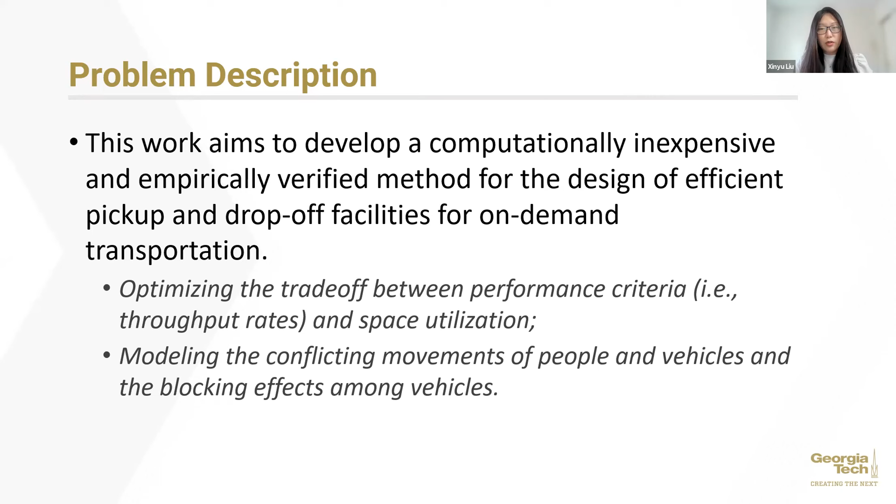Here are certain facility layouts that we're examining, and our goal is to look out for the best facility layouts among several types I'm going to introduce right now.

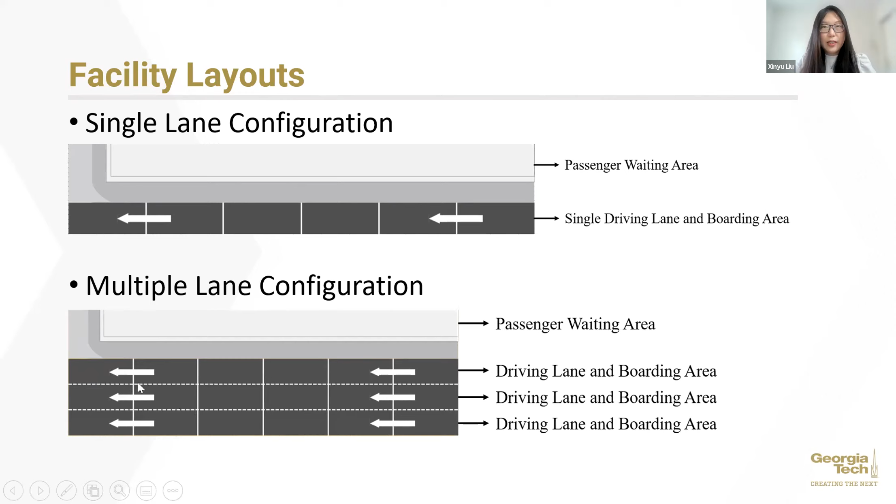The first one is a very common one, called a single lane configuration, such that there is a single driving lane and vehicles can park on the driving lane and pick up and drop off passengers on this single driving lane. Similarly, we have a multiple lane configuration, which is just parallel single lane configurations, and we can treat the system as independent lanes that are each operating on their own. We can see this example quite frequently at places like airports.

The next configuration is called a single-sided zero-degree configuration. By single-sided, we mean that there's a boarding area with boarding spots on only one side of the driving lane. By zero-degree, we mean that each boarding spot in the boarding area is parallel to the curb, that is, the angle between the boarding area and the curb is 0 degrees. Similarly, we have a double-sided analogy for single-sided design, such that each driving lane is neighbored by two boarding areas on its both sides.

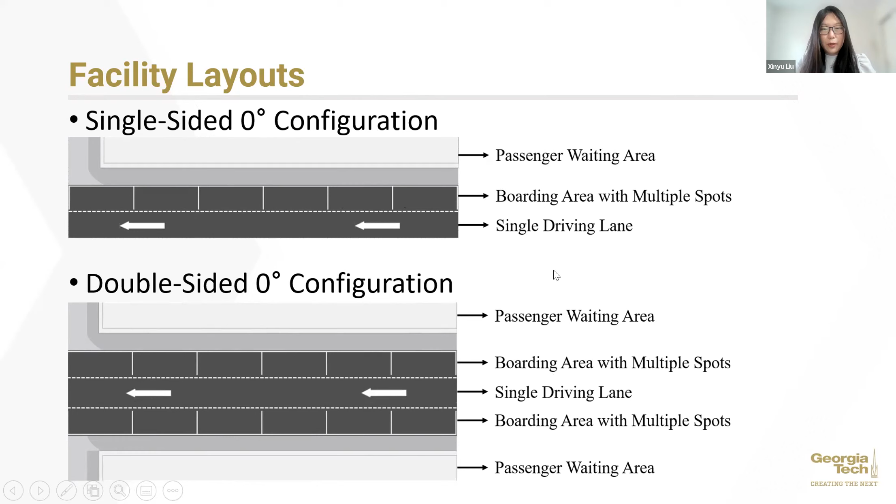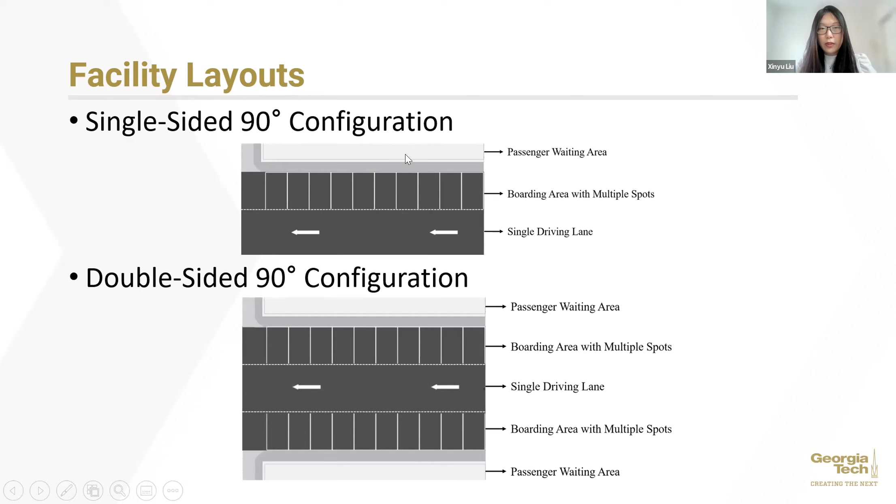Similarly, we have a single-sided 90-degree configuration. It differs from the 0-degree configuration in that each boarding spot is orthogonal to the curb space, such that the angle between them is 90 degrees. More often than not, in practice, we can see angled configurations, in the sense that the angle between the parking lots and the curbside could vary, like 45, 60, or 75 degrees as well. We would just like to highlight that our model can accommodate all these different combinations.

So without further ado, I'll just jump into the numerical results and share some insights that we observed from our simulation results.

Next, I'm going to present basically 6 types of configurations. As we have seen just now, we have single-sided versus double-sided configurations. We also have 0-degree configurations versus 90-degree configurations. In addition, we consider 0-degree configurations with long spots, such that each boarding spot is long enough for vehicles to enter and exit both by going forward.

Another alternative to the 0-degree configuration is when we have short spots, such that vehicles have to back into the boarding spots when they enter. And for 90-degree configuration, for safety considerations, we assume that vehicles always enter by going backward and exit by going forward.

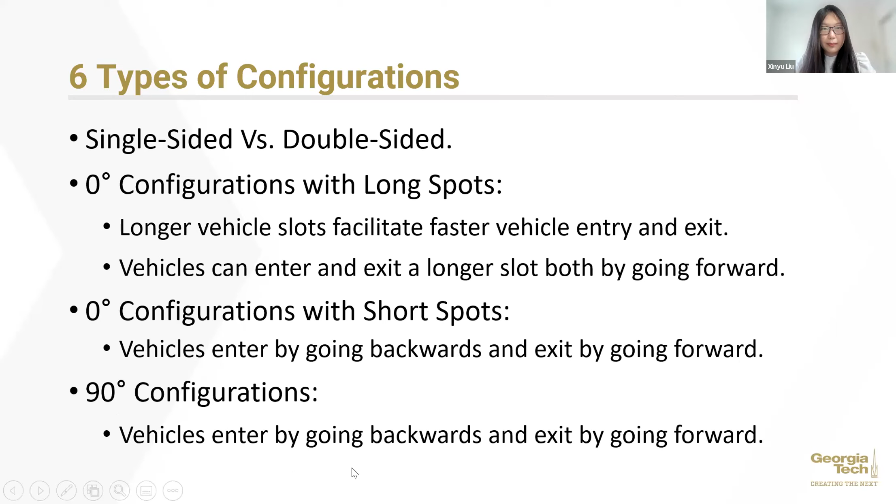Here are some results we would like to highlight, assuming the mean service time, which is the time taken for loading and unloading passengers as well as luggage, to be 60 seconds. This is a plot of how the throughput capacity of each kind of configuration varies as the total number of boarding spots in the facility varies. The main insights are the following: first, throughput capacity increases as the number of spots increases, but at a decreasing rate for each configuration. This is what we always observe in the real world as decreasing marginal return.

Also, in terms of which configuration is the better choice for this specific mean service time of 60 seconds, we observed that single and double-sided 0-degree configurations with long spots have much larger throughput capacities in general. That is this yellow curve and the orange curve on top of the others.

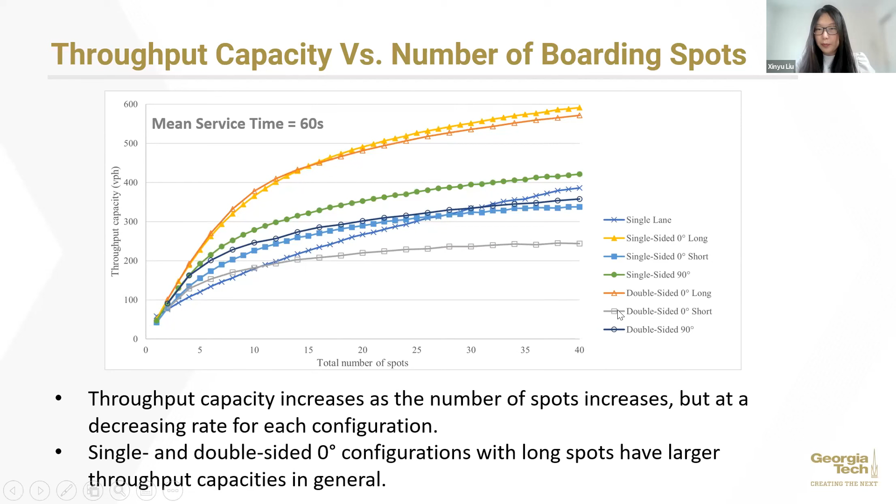Similarly, we could also analyze the throughput capacity of the facility versus the area that it occupies. In this plot, instead of having the number of spots on the x-axis, we have plotted the area occupied for different configurations. It's worth noting that different configurations have different lengths and widths for each boarding spot, so with the same number of boarding spots, different configurations might occupy different areas.

We have two insights highlighted here. The first one is that the double-sided 0-degree configuration with long spots utilizes the space most efficiently for medium to large size facilities. That is the orange curve on top of the graph.

We also observe that single-sided 0-degree configurations and single-lane configurations can be desirable choices for larger facilities, depending on the shape and size of the available spaces. That is these clusters around here. By the shape and size of available space, we also consider in practice what the available facility size is, which differs based on the case-by-case scenario. For example, if we consider a single-lane configuration, that will most likely require a rather linear and long-spanning space.

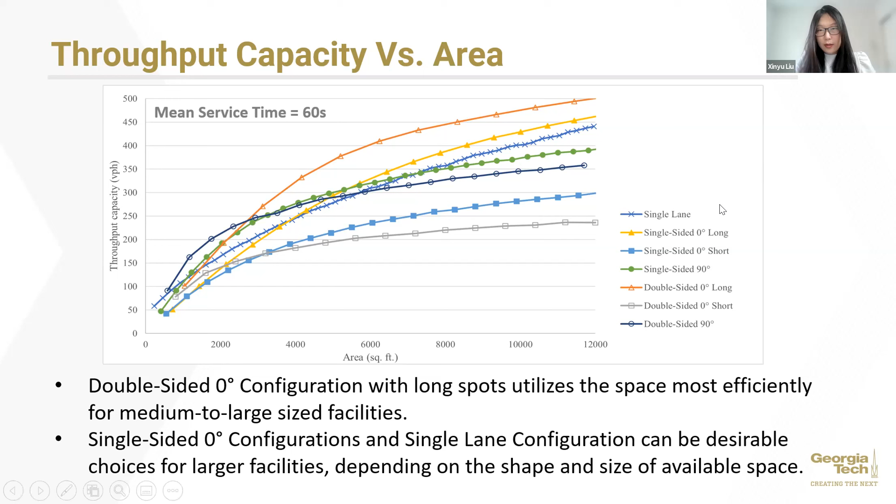So far, we have looked at a service time of 60 seconds, around 1 minute for each vehicle's pickup or drop-off activity, which could be relatively short or on the shorter range of service times that appear in real life. Now we consider the other extreme, most likely the upper bound for mean service times, around 300 seconds or 5 minutes.

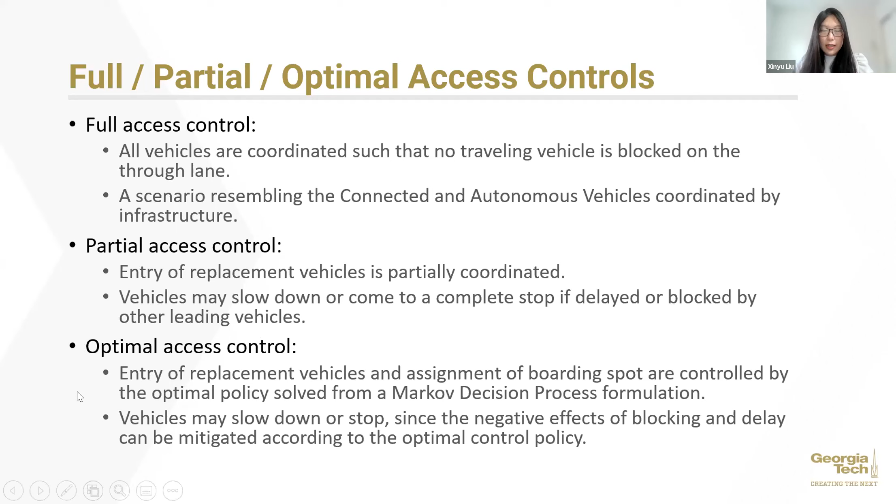So for now, we may assume that optimal access control is the best that this facility design could achieve.

Next, we show a comparison of how full and partial access control perform as compared to the optimal access control. In these two plots, for example on the left, we have single-sided configurations. Here we plotted the percentage deviation of the performance of full or partial access control for each specific number of boarding spots considered, as compared to the optimal.

As we can see, the deviation increases as the number of spots considered in the facility increases. Also, for configurations like single-sided 0-degree configuration with short spots or single-sided 90-degree configurations, where each boarding spot occupies smaller space and are considered more compact configurations, the deviation increases very fast, especially for partial access control.

We may have a similar observation for double-sided configurations. In general, throughput capacity under full access control could be near optimal for nearly all configurations, while partial access control can be suboptimal, especially for these compact configurations.

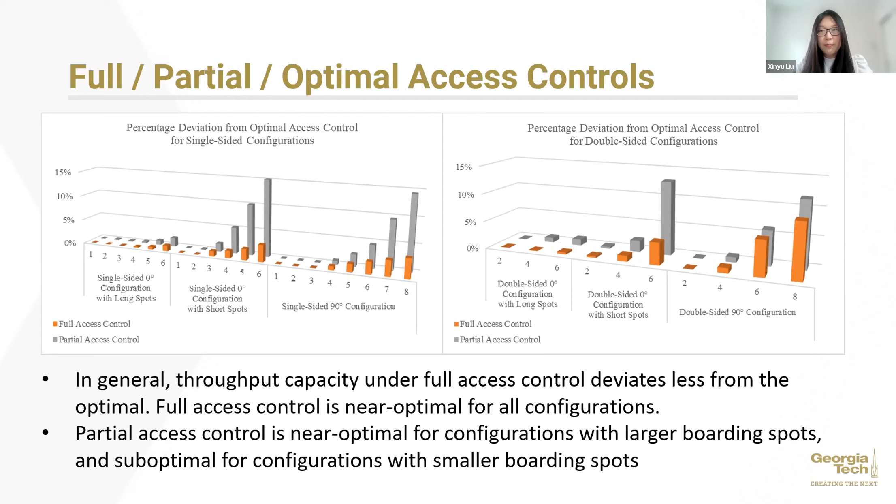We hope this would help people who design and operate such facilities decide what might be a better access control policy to increase the throughput of the facility, especially in the case that the MDP solution, which is optimal access control, is very hard to solve. So simple policies like full and partial access control could be very helpful in practice.

Through our study, we also found very interesting suboptimal dynamics under partial access control. This is an example from the single-sided 0-degree configuration with short spots, such that the blocking is relatively more significant among vehicles. By running the simulation, we found out the system runs into a state such that...

The leading replacement vehicle in each platoon is assigned to boarding spots that are closer to the facility entrance. While they are having their maneuver into the assigned boarding spots, they're actually blocking the entire platoon behind them. By that, there is a very large degree of blocking among vehicles that is happening, and this is what we consider a very suboptimal dynamic of the system.

It's worth noting that by default, the boarding spot assignment or choice rule is to assign the spot that is closest to the facility exit to a vehicle. So by default, the desirable behavior of the system is very different from what it exhibits after a long time, or in steady state.

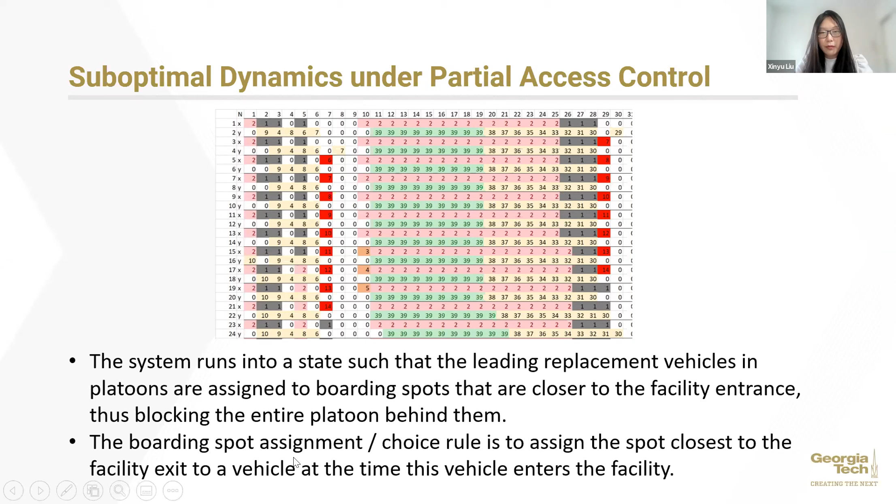And here we show how this suboptimal dynamics evolves over time once it has reached steady state. As we can see, this is from a time period of around 200 time intervals, and it goes on to almost 1,500 time intervals.

We can see here the first column has a very similar pattern to the fourth column, and so it's the second column and the fifth column, as well as the third column and the sixth column. So it suggests that once the system runs into this suboptimal dynamics, it will just keep on looping again, and it will never get out of this suboptimal state.

We also tried to manually reassign the boarding spots in one state of this loop, and the result is the system returns to this bad behavior within several hours of simulation time. So in a sense, this suboptimal dynamics is very robust when there are more perturbations to the system.

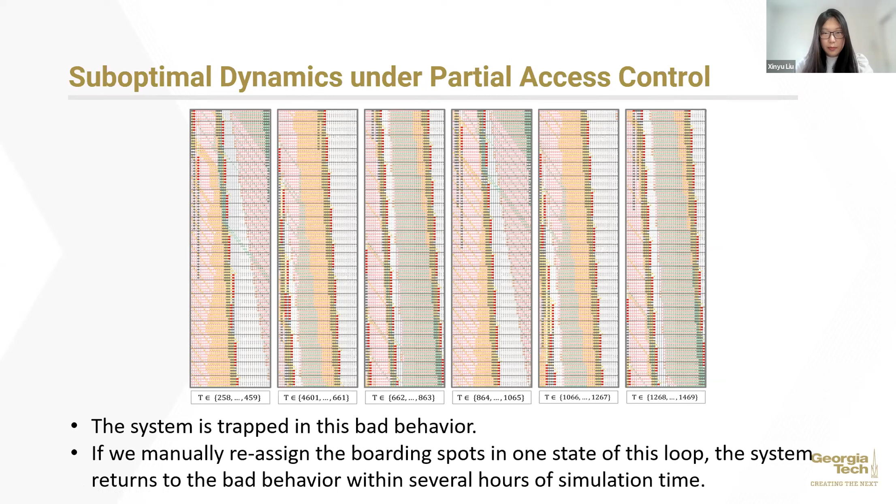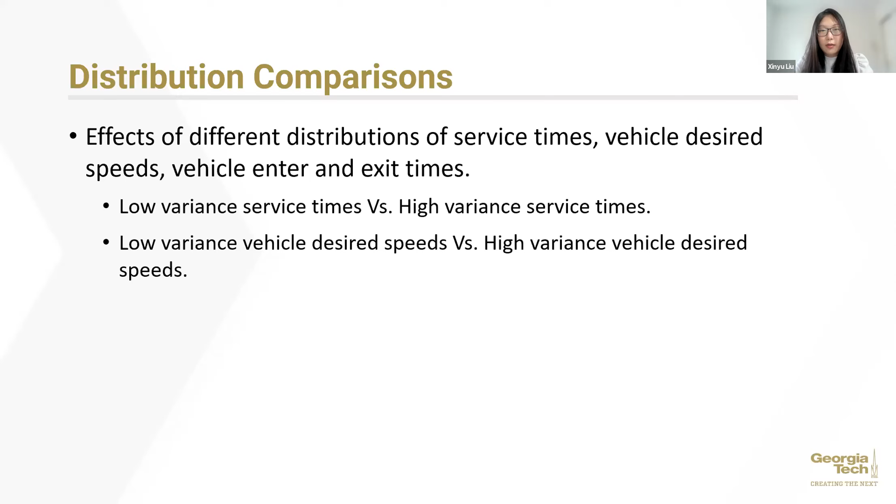This also in some ways suggests that if we have a system that is fully operated with connected and autonomous vehicles with synchronized movements, that will increase the throughput of the facility in a significant way.

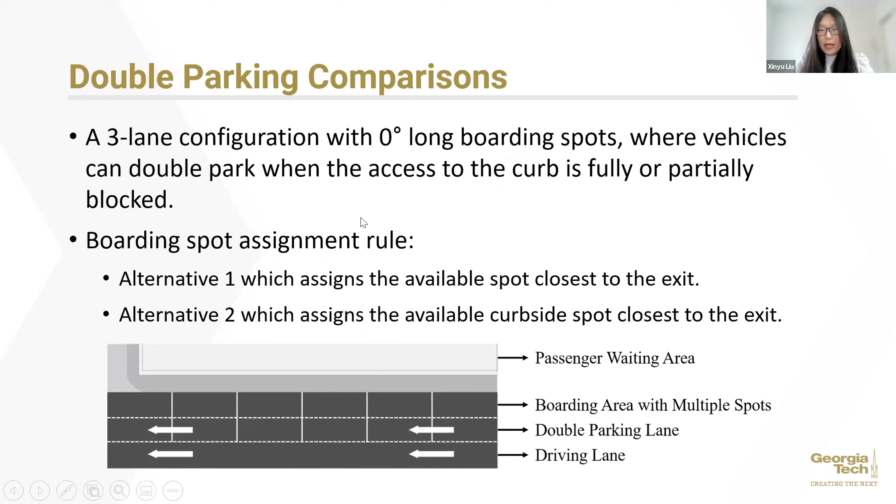Last, we also consider double parking, which is a bad behavior, and it somehow also creates safety concerns. Just to quickly go over these results, we found out that even though double parking configurations occupy the same space as double-sided 0-degree configurations, the throughput is much less than the double-sided 0-degree configurations.

Okay, so this basically wraps up our presentation today, and we hope that these insights derived from our numerical simulation could be shared and discussed among people like our attendees today.

Okay, Srini, can you see my screen again? We can, but it's really zoomed in. Oh, it's zoomed in? Yeah, we see basically the Georgia Tech logo. Okay, now the presentation is in design mode. Okay, so just present in the design mode. Okay, got it. So, is that better? No, now we see your notes as well. Oh boy. Or outline, actually. We see the outline of the presentation. Okay, what I'll do is I'll share just a screen. That will be the easiest way to address this, I guess. Otherwise, I don't know how to get past this. So, alrighty, let me go here and see if I can do it again. How about now? Now it's okay. We still see it in design mode, but that's fine. It's visible. It's feasible, okay.

I'll just try to put it in presentation mode once. If it doesn't work, I'll come back to the design mode. Is that better? Well, we see the presenter's screen now. Okay, so well, let's go with this then. Yeah, this is fine, this works. Okay, wonderful, sorry about the situation I've been having. I'm still trying to figure out what's the challenge here when I'm changing. Okay, so let me go back to my, okay.

So this particular presentation is based on work, as Alex mentioned, for the city of Peachtree Corners and Curiosity Lab. The intent of this presentation was to see what are the effects of autonomous vehicle technologies, both in terms of how they affect infrastructure and also driver preferences related to how those infrastructure interactions in the presence of autonomous vehicles would work.

This was in the context of a presentation related to emergent technologies, whether autonomous vehicles, autonomous automation, connectivity, or electrification. All of these lead to challenges that are particularly transformative, but especially the autonomous technologies are disruptive because they involve handing over control to the vehicle or to the autonomous system in a vehicle.

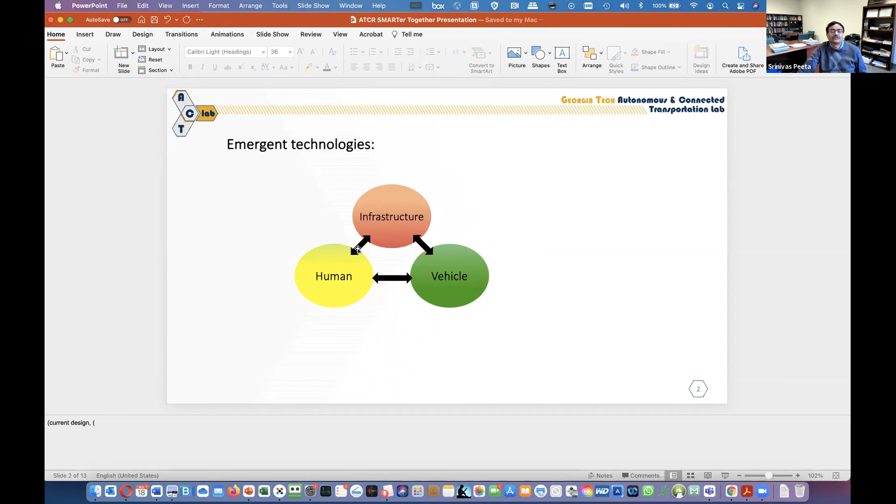Most of the focus, especially in the media, relates to how autonomous technologies enhance the driving experience, but also some of the pitfalls they illustrate. So a lot of the focus has been related to the technology itself. But in the real world, the reason why these technologies are not yet widespread is because in society there are interactions between these vehicular technologies with the human, the driver, and the surrounding people in the traffic environment, as well as with the infrastructure - that is, whether the current infrastructure is adequate, and what changes need to be made. It's these interactions, illustrated here through these arrows, that become particularly important to understand.

In terms of background, when you look at autonomous vehicles, a lot of the work that's been going on related to understanding how they can be introduced into society and transportation systems is either in terms of controlled test beds, or more living lab type test beds - for example, Curiosity Lab is one of them, I'll be talking about that - and then pilot studies, for example how Waymo has introduced cabs in the vicinity of the Phoenix area.

These entail also partly infrastructure modifications. Some of these modifications can be in terms of having dedicated autonomous vehicle lanes where only autonomous vehicles can travel, having barriers that separate the lanes for autonomous vehicles from the regular vehicles driven by humans, having pick up and drop off lanes where vehicles come, drop off and move elsewhere, which is particularly important in dense urban areas, and also roadway markings.

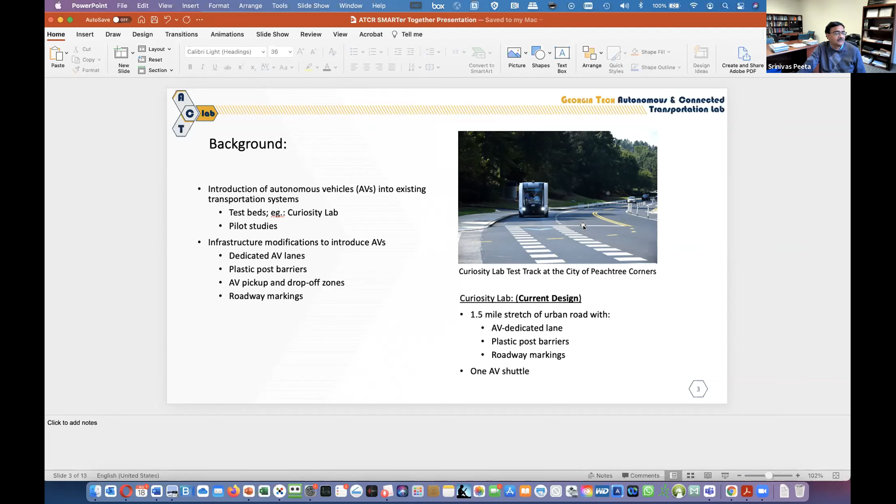All of this you will note if you look at the Curiosity Lab current design, which is a 1.5 mile stretch of roadway with a dedicated AV lane in both directions. At the time of our work, there was an AV shuttle that used to operate in this lane. In addition, there are plastic post barriers that separate that from the regular lane where human-driven vehicles are, and you also see road markings out there.

In terms of what the current design entails, on the left side you'll see that there are 4 lanes, and that's what you see on the right side in the figure as well. The current one has 1 travel lane in each direction for non-autonomous vehicles, and dedicated lanes for autonomous vehicles in each direction - 1 lane each. The key point to note, which you possibly will note, is that the regular travel lane for human-driven vehicles is 10 feet 6 inches, while the one for autonomous vehicles is only 9 feet. Part of that justification is the expectation that autonomous vehicles are much more reliable in maintaining their lane position, unlike humans who tend to drift, and there's heterogeneity in that. So autonomous vehicles would require a lesser amount of space, but this has implications too.

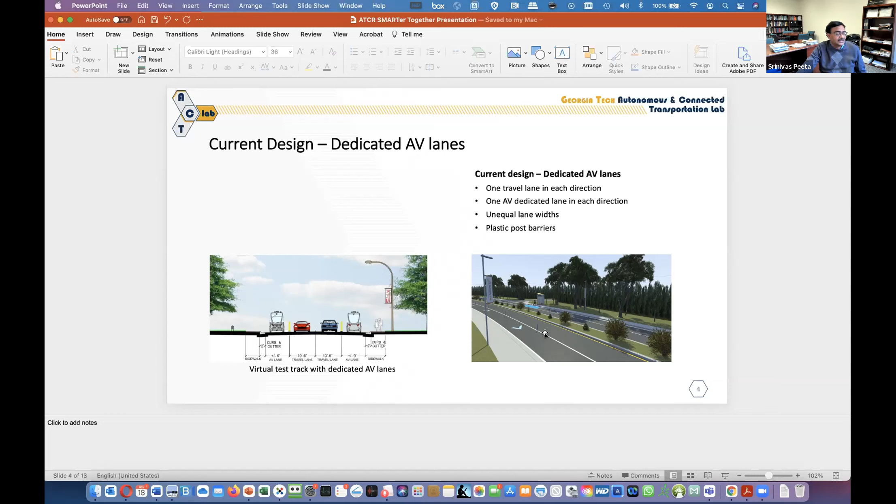Then there are the barriers that I mentioned, which separate the autonomous vehicle lane from the regular lanes. The next one is an alternative in which we have all lanes - 2 lanes in each direction - for both autonomous vehicles and human-driven vehicles. The idea is that we'll get to this point when we have autonomous vehicle market penetration at a substantial level, or they become more commonplace.

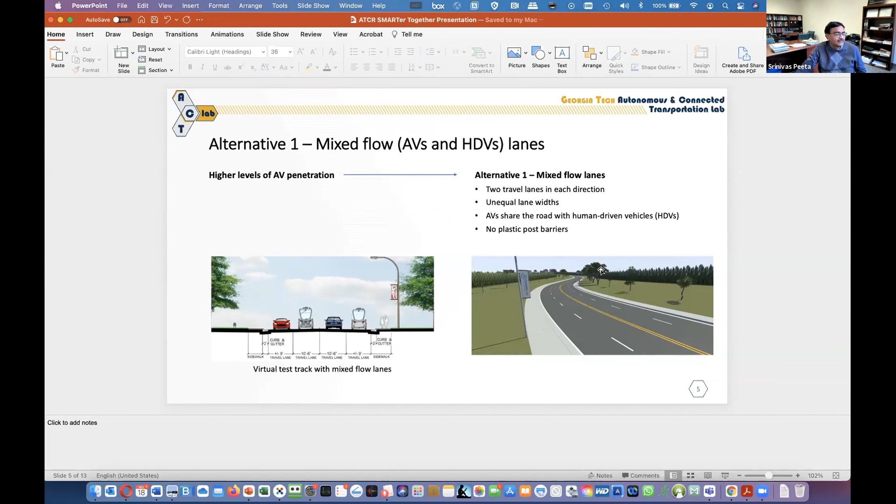Again, this was based on discussions with Curiosity Lab and Peachtree Corners in terms of what other infrastructure designs they wanted to test. So they have 2 lanes in each direction, but these lanes are unequal, as I mentioned, because the inward lane is still 10 feet 6 inches, while the one close to the curb is 9 feet. They share the road between autonomous vehicles and human-driven vehicles, and there are no plastic post barriers, because at this point the idea is that people are comfortable driving alongside autonomous vehicles.

Then there's a second alternative where, if you look at this diagram to the right, you'll note that in one direction there's a single lane with mixed traffic flow of autonomous and human-driven vehicles, and next to that, which is barrier separated, we have lanes in opposite directions where bicycles or scooters can go.

So at the curb there, which was previously the autonomous vehicle lane, that's been translated into a 2-way bicycle scooter type lane. And the other direction, again, it's similar to what we had in alternative 1, where any autonomous or human-driven vehicle can go. There is no separation involved.

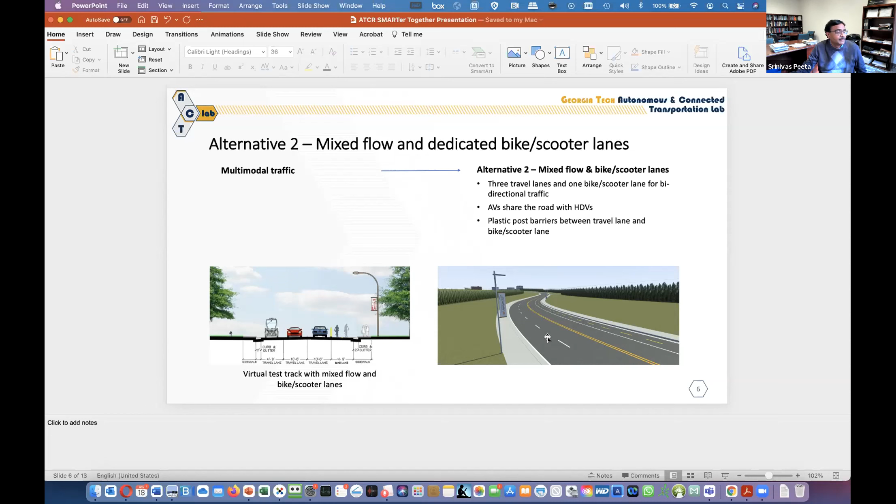Based on this, the objectives we aim to study are twofold. One, the interactions between the human driver and the infrastructure, in the current design and in alternative 2, because there's also the plastic post barrier separating the lanes. Whereas when we look at capturing the effects of autonomous vehicles on human driving itself, the idea is what interactions happen when autonomous vehicles are there in a mixed traffic flow stream.

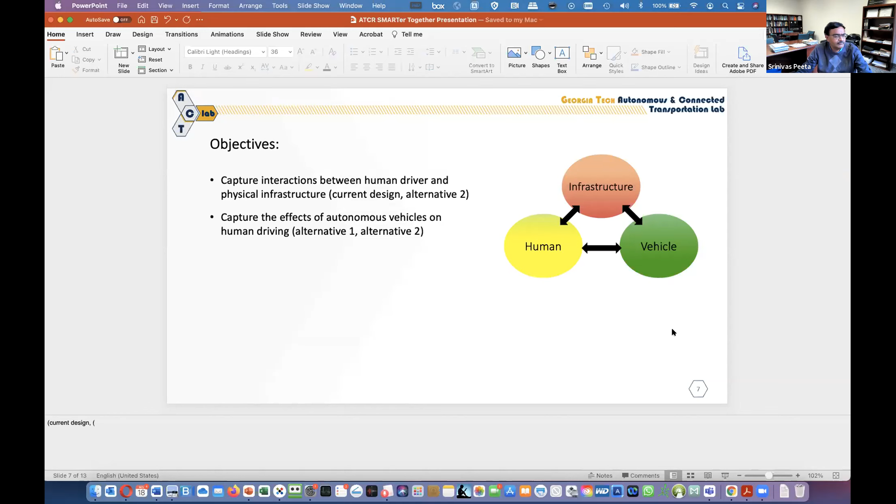So we conducted driving simulator experiments based in the driving simulator lab called the Autonomous and Connected Transportation Lab at Georgia Tech, from which we had kinematic data, the driving data. Participants would drive and we could get speed, acceleration, braking information, but also their physiological information. For example, EEG brain signals, ECG heart signals, and a non-intrusive way of tracking eye position, which is important to understand where people are focusing and whether there is too much load. And then also driving behavior in terms of the position of their head, hand, legs, and so on.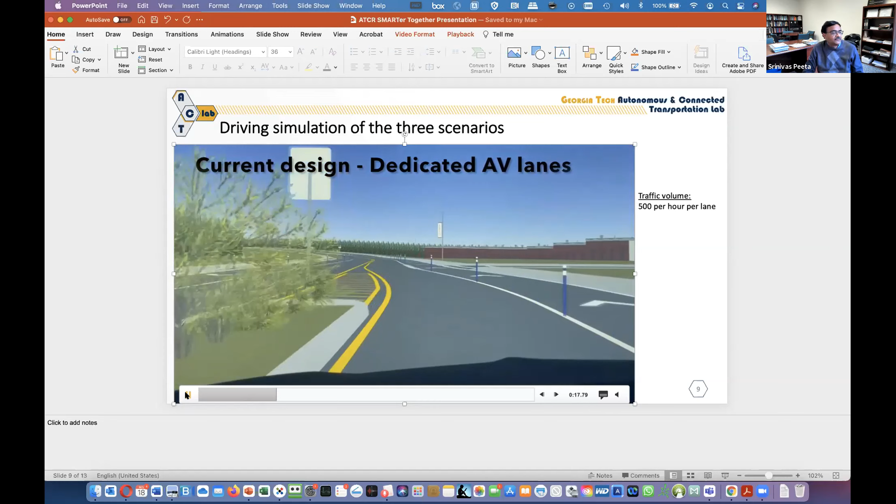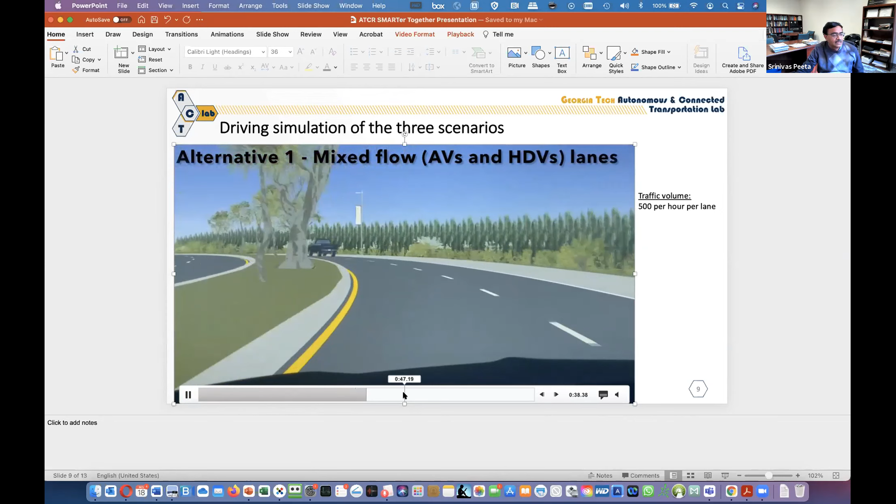From there, we shift to the next one, where both autonomous vehicles and human-driven vehicles can go on either lane. As I mentioned, the lanes in each direction are of uneven width, and there are consequences to that as well. If you go a little further, we have alternative 2, which is mixed flow and a dedicated bike lane in one direction. As you can see here, there's one lane for autonomous and human-driven vehicles, then one for bicycles in either direction. On the other side, you have just two regular lanes available for both human-driven vehicles and autonomous vehicles. With that, I will go to the findings.

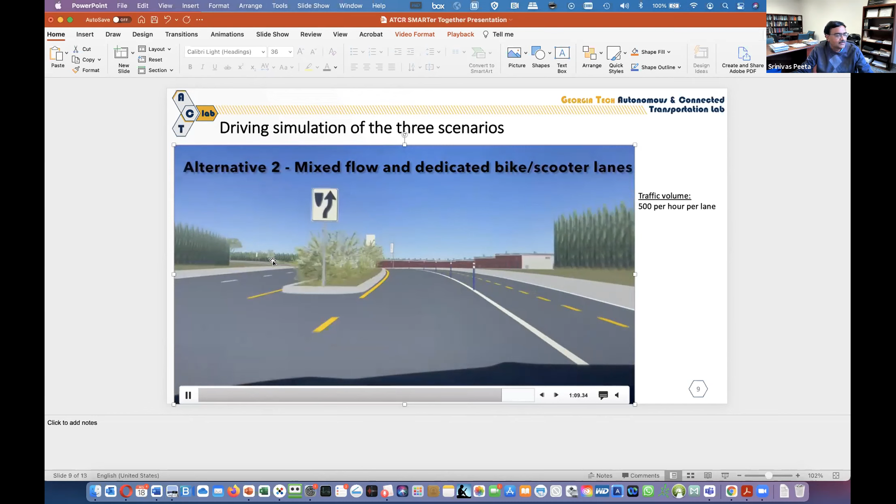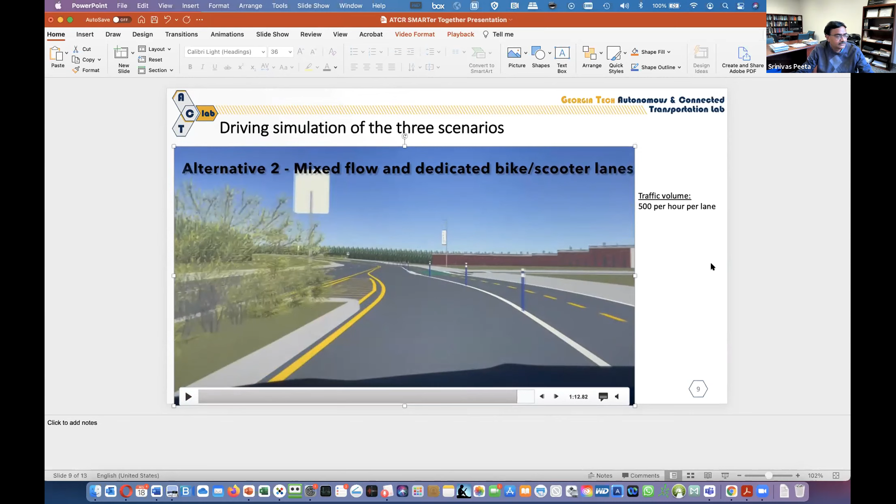For alternative one, what we note is that when we have two lanes freely available for vehicles, vehicles can overtake other vehicles, so in general the average speed tends to be higher. But on the other hand, because one lane is narrower than the other, the ability to shift across lanes and overtake leads to less stable trajectories, because people are in some ways confused by lanes of different widths. That tends to throw people off and cause confusion, so that's something to keep in mind, even though the original hypothesis was that autonomous vehicles require a lesser amount of space.

The third finding is related to human response, and this is mostly an artifact of our experiment, in the sense that even though the characteristics of autonomous and human-driven vehicles were different in the experiment, there were no overt or outward physical signals that would allow participants to differentiate between autonomous vehicles and human-driven vehicles. So they treated it as identical.

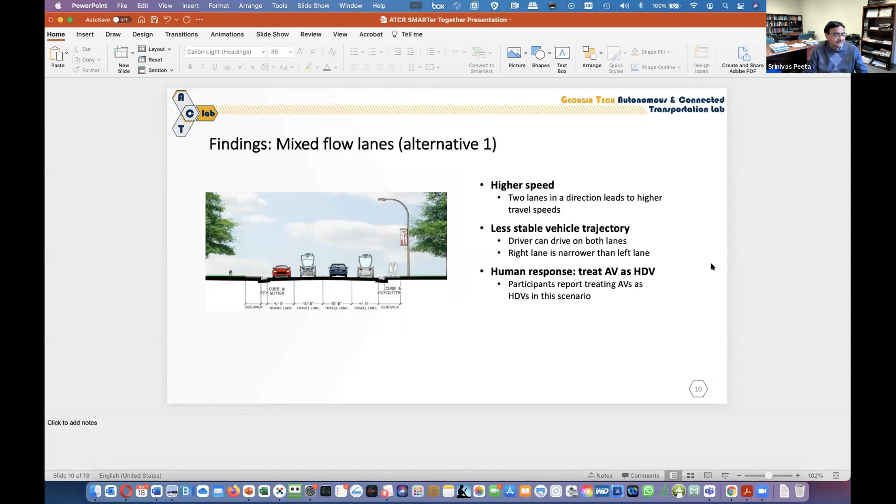For alternative two, with the mixed flow and dedicated bike lanes, two aspects to keep in mind. When there's a lane next to the dedicated bike lane, with only one lane available for mixed traffic flow, that caused people to feel less comfortable. It also raises safety concerns because they cannot cross the yellow line if vehicles are coming in the other direction. But from an aspirational standpoint, people felt that sustainable transportation designs would be particularly useful, actually liking the notion that we create space for bicycles or e-scooters. This has implications because these days we have micro-mobility services or modes that are coming into play.

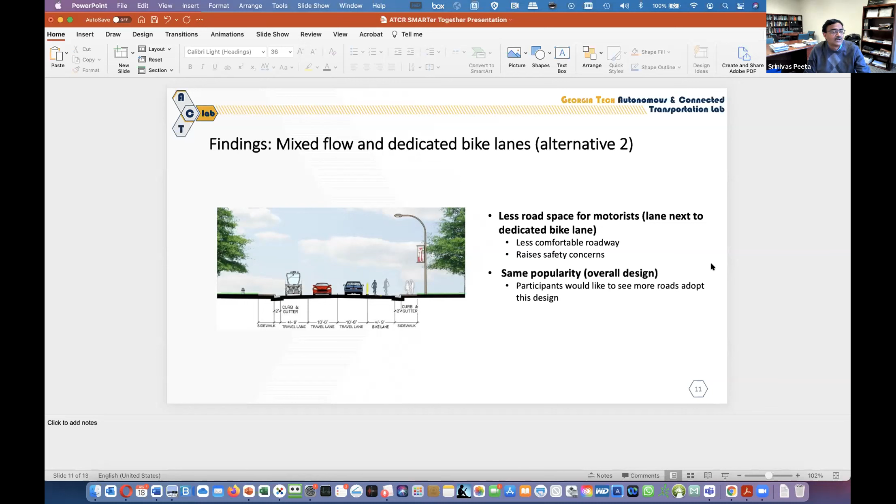And there is a notion there that these are legitimate travel modes that can be particularly helpful in society. The last slide here is related to other findings. Primarily, what we noticed is participants who had greater amenability to using autonomous vehicles also felt more optimistic about driving besides them in a traffic stream, versus those who are more hesitant.

The last point I want to make is that there are consequences in terms of infrastructure design. First, the brain and heart activity were more prominent within the intersections. This was not surprising because intersections are locations of conflict of right-of-ways, so naturally people are more alert.

The same thing happens, however, when we have a plastic post barrier and a median. In many ways, people are boxed into one lane, and at that point, there are people who want to watch both directions, so there tends to be more activity triggered in terms of their conscious effort, and that's why that increases as well.

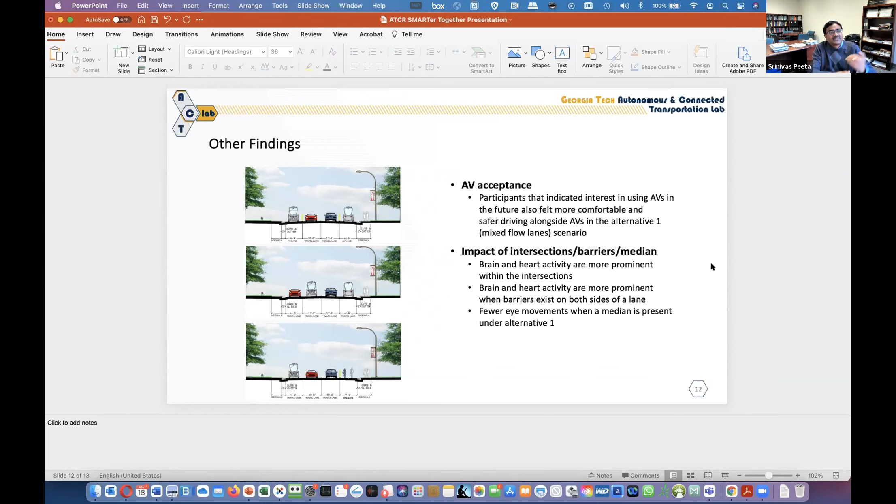The third one is, in the case where we had alternative one, when there are two lanes, if there was a median between the two opposite directions, then people had less focus in terms of eye movements, because they were assured that the median was protecting them from going to the other lane, or they were not worried about traffic coming from the other direction. So this is the final point I wanted to make, and this concludes the presentation I wanted to make today.

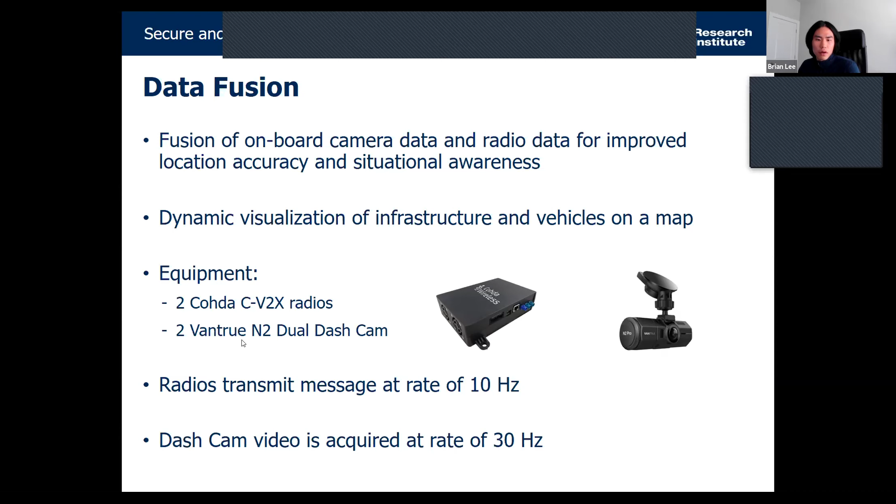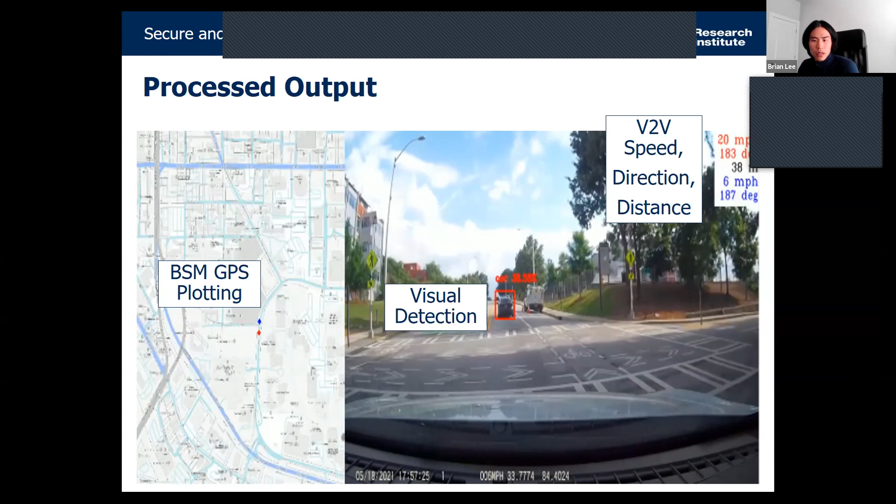I don't know if we have a lot of time, so I'll just skip the video. But essentially what we got here was a max range of about 760 meters. At 760 meters away, there's no way a camera or a LiDAR is going to be able to detect that, so it definitely expands our field of view.

A caveat is that the CV2X radios we received were experimental radios, more for development and not for performance. What we saw was, even though the vehicle was right in front of us with clear line of sight, we weren't receiving packets, or weren't able to listen to packets. We were definitely transmitting, but the receiver module was having a little bit of trouble.

Some concluding thoughts after going through that research project: I'd say the CV2X standards are still developing, so I think it's a great area for research where value can be added. Something that actually worries me is that with these new radios, if we do implement them on vehicles, we're really just introducing a new attack vector.

So I think automotive cybersecurity really needs to be on point here, right? Not just protecting the vehicle itself, but the communication networks that it's part of. This project really gave me more appreciation for that, because with vehicles, it's more about people's lives that are at stake instead of servers, where you might lose your users or a bunch of money. But I wanted to end it with, let's go automotive cybersecurity.